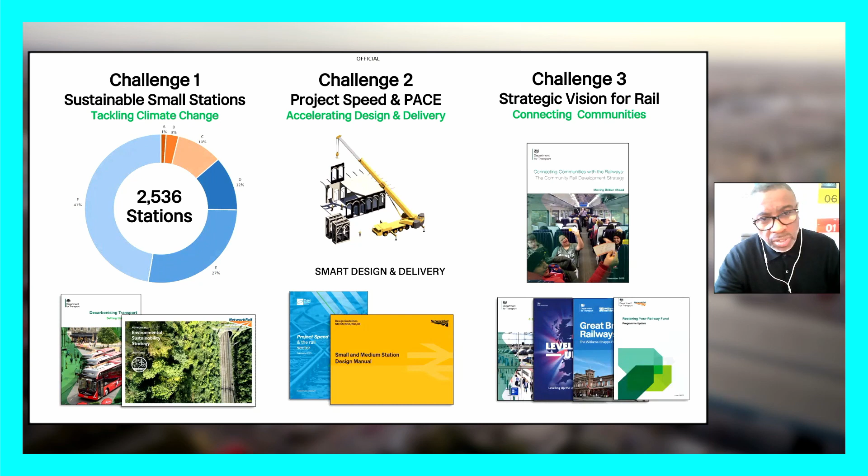Hub station, really, this model addresses three challenges. The first challenge involves making stations sustainable.

We have over 2,500 stations, with medium and small stations making up 85% of those, and the demand for them is growing. These stations can and should be massively aligned with our sustainability strategy and aspirations to be carbon neutral by 2050.

The second challenge is about a response to the government's Project Speed process. It's really to accelerate the design and delivery of key infrastructure, and we've tasked ourselves with producing a benchmark industry reference design for stations that embraces four main design drivers.

We build only what's needed. We build adaptable and reusable infrastructure. We use smart design and delivery technology, off-site fabrication, and modern methods of construction where it's appropriate.

And lastly, the third challenge, to me one of the really important ones, is that successive governments have a vision for making the railways more community focused. So there are various published white papers pointing to this strategic direction, and it's really about responding to the levelling up agenda that's under pressure at the moment, with possible cuts to government funding.

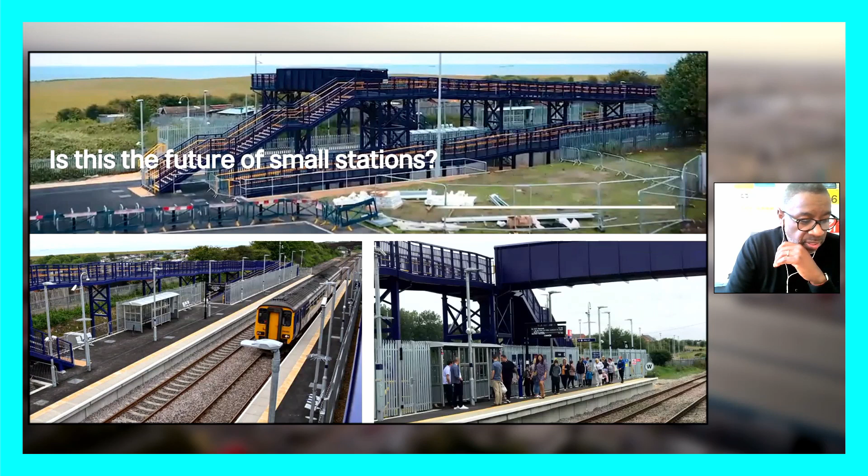So one of the questions we were asking ourselves with what we were currently building was, are we achieving any of this today? And in the course of viewing many stations, which I do as part of my job, we came to the conclusion that we can and should be doing better.

This is a £10.5 million station completed in 2021, and it consists of a couple of platforms, some bus shelters, and a huge car park for 110 cars and over 200 meters of ramps.

And when you look at this, you start to think, well, is it really putting passengers first? It's failing in terms of its ease of accessibility. Sustainability - there's a hell of a lot of steel in this. And, probably in terms of community engagement, it's not somewhere you want to spend your Friday night.

So we're asking ourselves those difficult questions about the small stations we're currently building, and do we see this as the future of them?

So over the past 4 years, we've been going through a series of stages involving research, competition, consultation, and collaboration. We started in 2018 with Tomorrow's Living Station, which was a research piece by Arup, and speculated on the future function of stations.

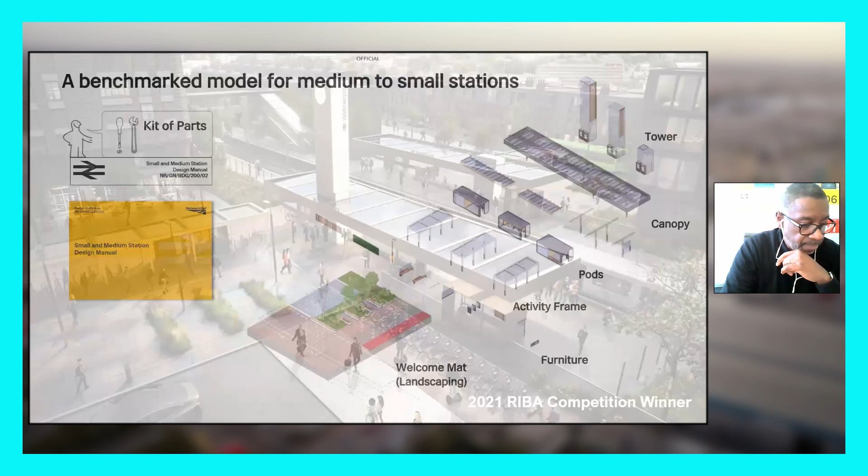What makes the station concept different? It's really a kit of parts designed to suit any location. It's highly flexible, it's adaptable, and it can be tailored to any budget.

And there are 5 main elements. There's a clock tower, the canopy system, what we call an activity frame, a welcome mat, which is another name for the public realm or landscaping, and that's actually part of the station design, and the waiting pods or activity pods that sit underneath the canopy or activity frame.

We're looking to provide this as a benchmarking model for future small stations on the network. The anticipation is this won't be built everywhere. It's not a one size fits all, but it's kind of a benchmark model, and basically a direction we feel we should be heading in terms of station design.

We also developed an implementation plan to go with this, which was aimed at sponsors of stations and really talks about how to implement this. So we provided a design manual and an implementation plan as part of a package of system of works.

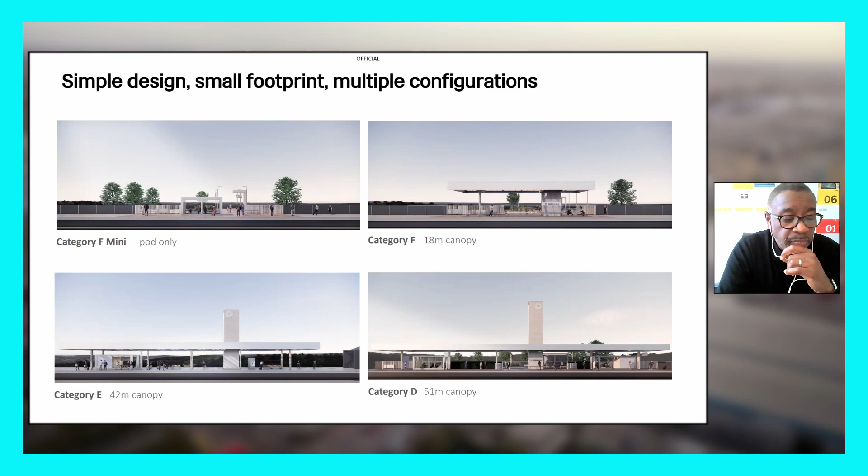The other thing about this design is that it's very flexible. It can be configured to meet a range of station scales, from a very small single platform waiting pod to a medium-sized interchange station. It has a very small foundation footprint, but maximizes a canopy system that is modular, expandable, and upgradable.

We've just completed the Explore Station National Public Engagement Programme, which ran across 11 cities and towns across the UK. We worked closely with the Design Council to assess public viability and acceptance. This included engaging with almost 30,000 members of the public, over 30 hours of independent design advice, and someone somewhere counted 6.7 million social media impressions. Not quite sure how you do that, but they somehow managed to do it.

And we showcased the project recently during the London Design Festival. What was really interesting was that stage one of Explore Station, the public response was quite varied. It was honest and instructive. People liked the design, but had reservations about exposure, security, and local identity. And there was a clear awareness of climate change.

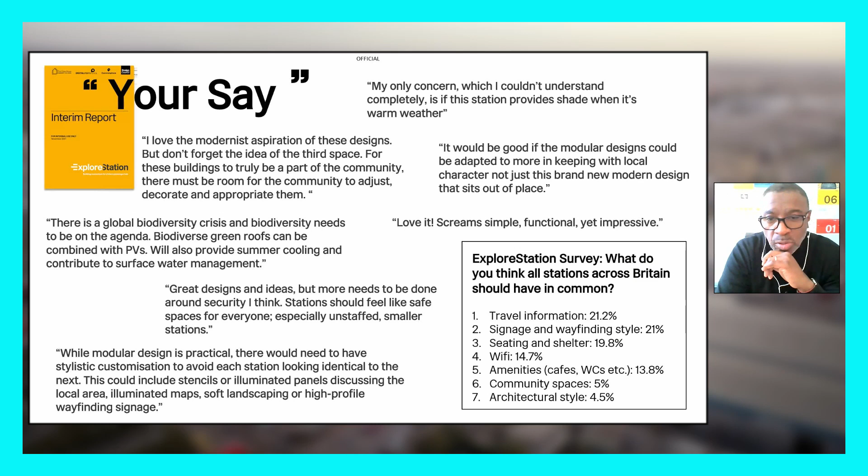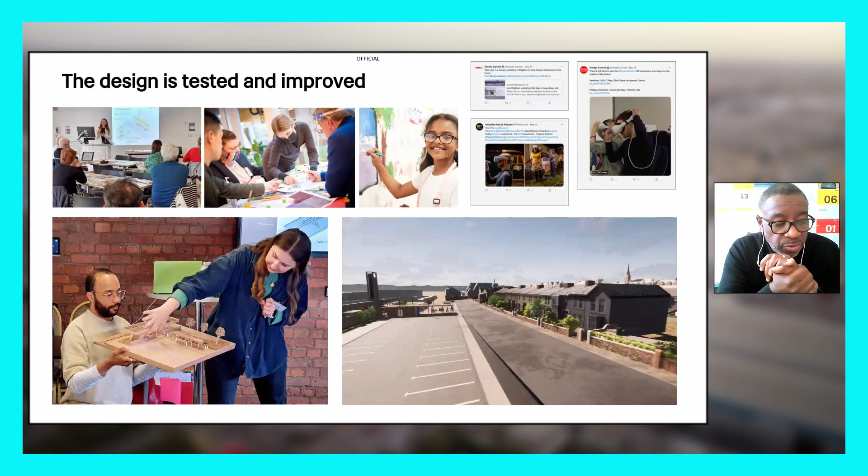Stage two of the Explore Station really was about engaging directly with diverse communities and stakeholders and taking into account their needs, ensuring they were heard, understood and considered, public engagement and collaboration, engagement via the commonplace online exhibitions run by the Glasshouse community led design.

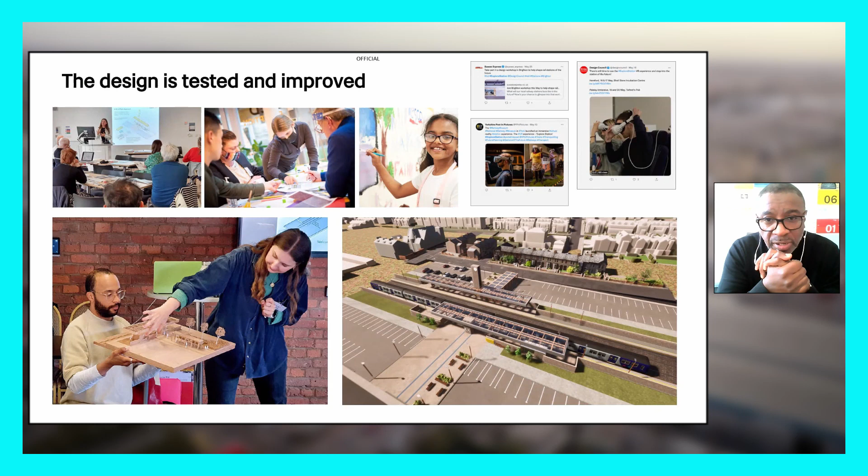Urban, like the animation you see at the bottom right. And it resulted in suggestive improvements to the design, more seating, more materiality, refinement of the waiting pod. And following this process, we can have confidence that the concept has been developed and evolved in collaboration with people and passengers in communities where this design may eventually be delivered.

Some interesting demographics we were able to gather during this consultation process in terms of gender, ethnicity, disability and age. There was an anticipation that the programme would attract a large proportion of people fitting the white middle-aged male demographic, and this was largely borne out. But there were efforts to reach a wider group of diverse groups, focus workshops, and by holding these immersive experiences.

So in the end, we think ThinkStation and Explore Station programs were quite successful actually in gathering a range of diverse opinions, options, and insight.

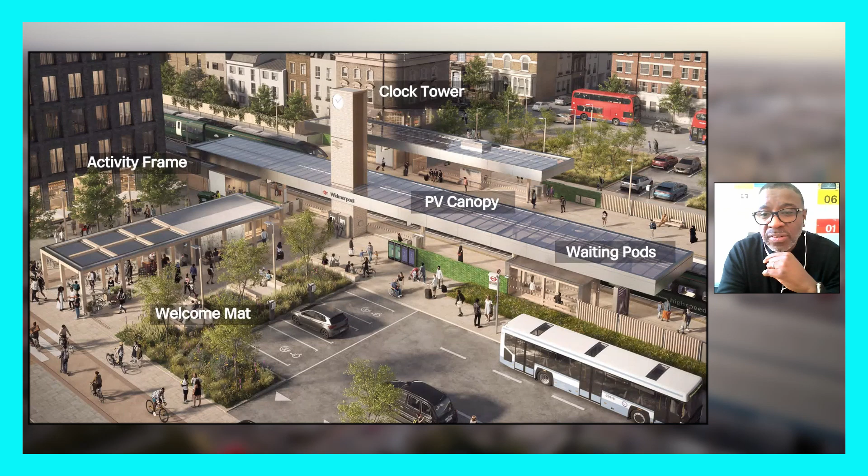I'll run very quickly through these last slides, just to give you a bit more focus and detail in terms of the station, how it is at the moment, how it's developed. These insights really fed into quite a detailed design, which we're working on now, and we're looking to develop this into a part prototype build.

We've had a lot of interest from the various train companies and various sponsors, so it's something that we're developing at pace.

The five main elements of design are a clock tower, a canopy, which is a photovoltaic canopy, an activity frame, the welcome mats I mentioned previously, and the waiting pods. The clock tower is, as well as being an emblematic symbol of stations, it houses all the incoming services, the PV batteries, and an access ladder to the canopy.

And the canopy itself provides, as well as shelter, it provides locally generated power, renewable power, and features a practical cassette system which allows you to upgrade it.

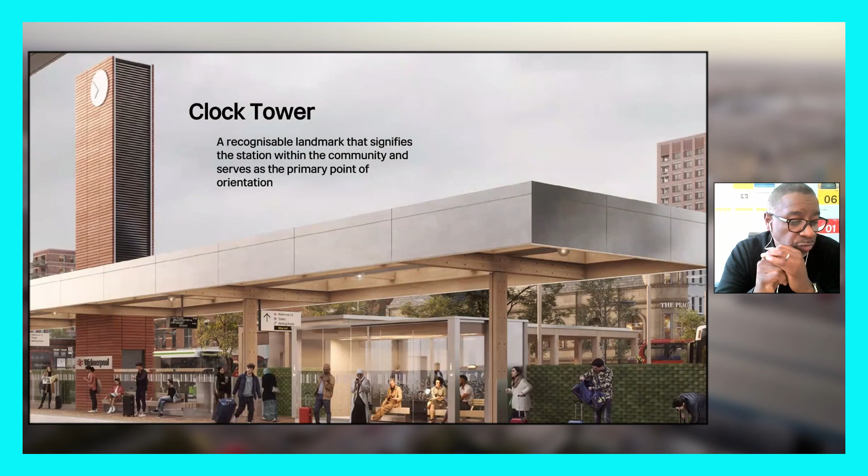Touched on the tower already. The tower also provides us with the opportunity to reflect local context by changing its cladding materials. So it could be timber, terracotta, steel profile cladding, etc., depending on the environment. And together with the feature walls at lower level, this gives designers the ability to add local character and distinctiveness to each station.

Underneath the canopy, it's quite generously proportioned. It's a structure of low embodied carbon laminated timber. It brings natural warmth to an environment. There's, of course, a long history of timber structures in railway history. This one is a modern interpretation of that, really.

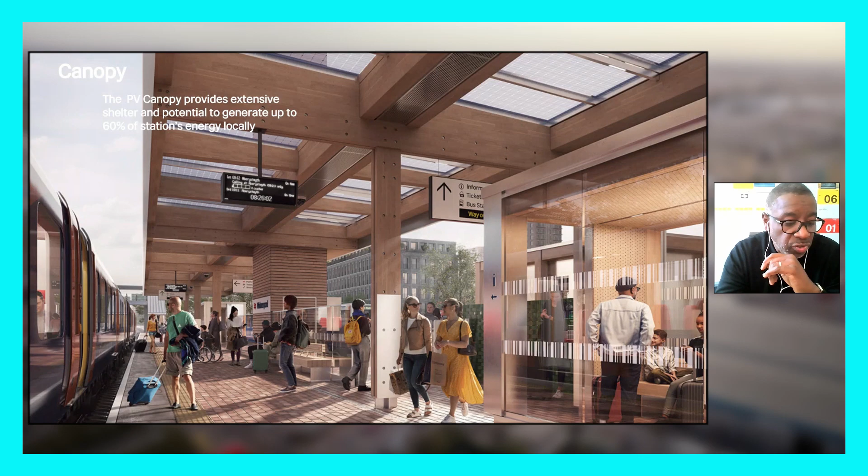It extends to the platform edge, providing real cover while boarding. Services are quite cleverly integrated into a central services spine, which houses cables for lighting, screens, and speakers, etc. So we're trying to do away with the clutter that you normally get with station canopies. And the PV glazing has the potential to generate up to 60% of the station's low power requirements to feed stuff like lighting, ticket machines, info systems, Wi-Fi, heating, that sort of thing.

Even at the smallest, most basic station, the option of the canopy provides ambience, level of cover, amenity, lighting, and basically improves the experience of waiting. It provides a spatial dimension that allows things to happen underneath it. Its extension along the platform allows passengers to spread out and makes it more efficient in terms of boarding and disembarking from trains. So we're looking to move from bus shelters, if we can, to at least something of this level of cover and value, really.

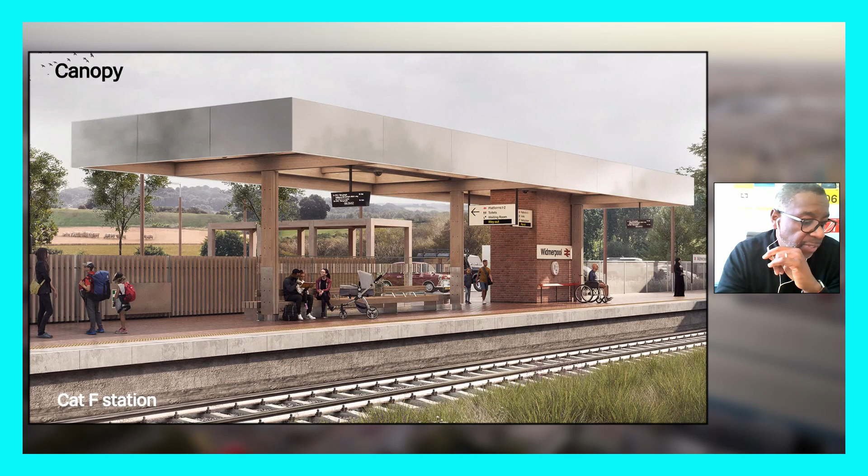Moving very quickly on to the welcome mat. Now, this is the thing that really distinguishes this station. This is designed as part of the station itself, so it has been factored into the cost of the station. It contains an activity frame and landscaping that actually continues all the way into the station onto the platform itself. These become a common built-in element and meeting place for social activities, and also a means to integrate climate resilient public realm design.

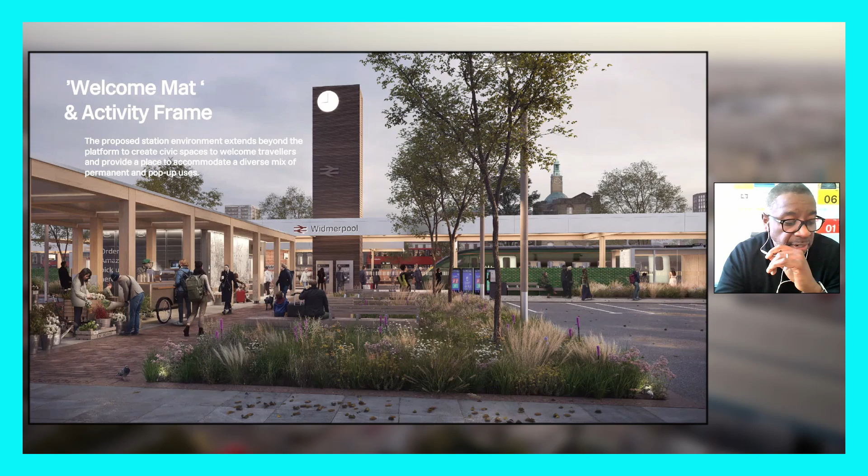The welcome mat means the station environment extends beyond the gate line. The activity frame is a simple, cost-effective rope and timber pavilion that can be scaled and adapted to each location. It creates an adaptable civic space for community uses that can accommodate a range of uses, pop-up activities and other uses. For large stations, it can be expanded to facilitate coffee kiosks, parcel pickup points, etc., that sort of thing.

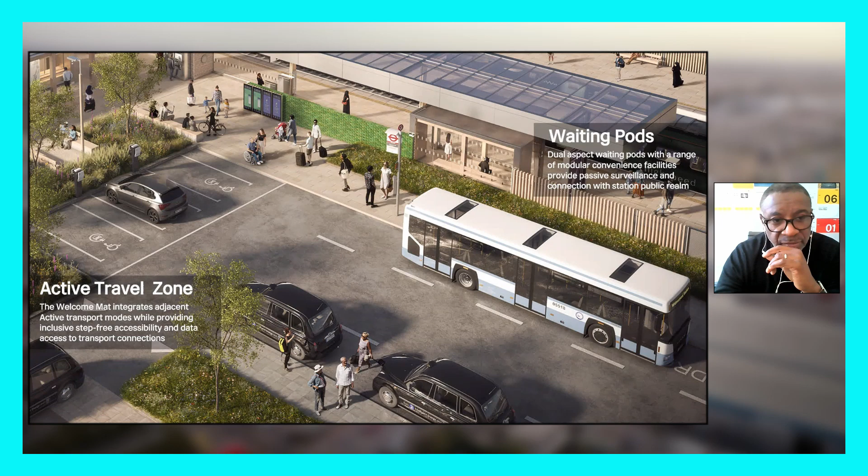This is a smaller version of it, for small stations, where it provides a flexible location for cycle parking, for example, or a weekend market, or other meanwhile activities. We're still looking at how we make the active travel zone next to the station work from a mobility, connectivity, and security point of view.

And finally, we're trying to redefine the comfortable modern waiting shelter. We're moving beyond the bus shelter to something a little bit more welcoming and comfortable, one that can work independently or be placed underneath the canopy or the activity frame. There's work still to be done on this, but the aspirations are a kind of transparent dual aspect waiting room with high visibility, integrated lighting, heating, customer information screens, and Wi-Fi, all powered by renewable energy.

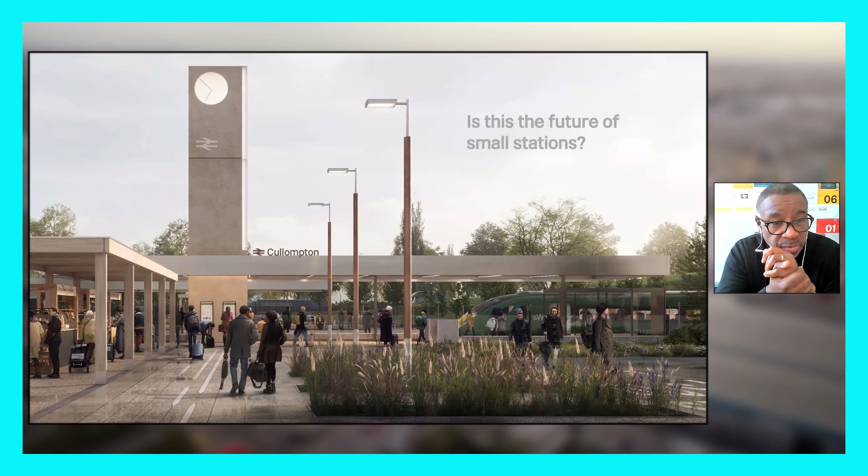Thank you very much, Frank. That was really interesting. How many stations did you say that you were planning on rolling this out? Was that 2,500? Is that an existing number, or is that a future projected figure?

That 2,500 is the existing number. So we're not planning to roll out to 2,500 stations, but certainly there's a substantial number of what we call smaller metro stations, I suppose, that are being planned. Some new lines that are opening, new residential areas and new urban quarters kind of need stations. And stations aren't just built by Network Rail, they are built by local authorities, they're built by developers these days. So anyone can basically apply to create a station, if all of the business case stacks up, etc.

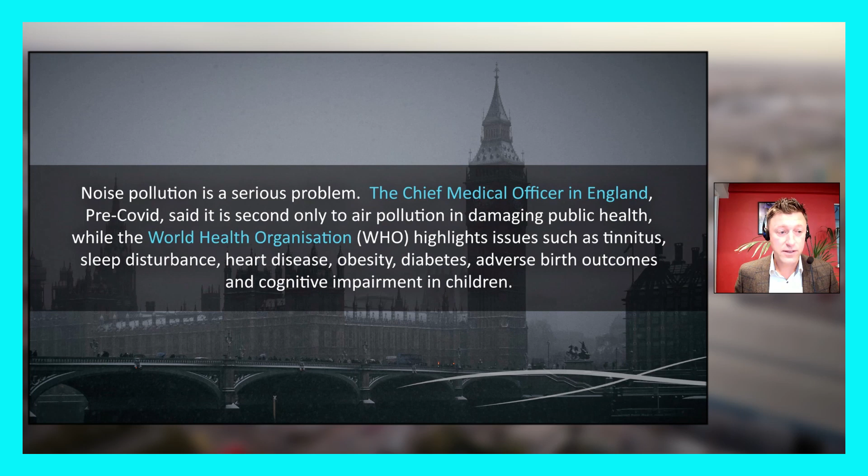What most employers don't realise is that prolonged high noise levels can actually cause serious non-hearing related health problems. The chief medical officer in England, pre-COVID, said noise is second only to air pollution in damaging public health, while the World Health Organization, who we've heard quite a lot about in the last few years, highlights issues such as tinnitus, sleep disturbance, heart disease, obesity, diabetes, adverse birth outcomes, and cognitive impairment in children.

But there is another noise-related safety concern that should be taken just as seriously when it comes to warehousing or fulfillment centres. High noise levels in the past have led to the use of ear defenders. The problem with ear defenders is you can't hear fork trucks coming or warnings from colleagues about falling objects. Even without ear defenders, reverberant spaces tangle the sound so much that you still may not be able to hear the vehicle coming or an important warning.

Emergency safety announcements are also difficult to decipher, especially for those with hearing conditions like tinnitus. Simon Wayne is Operations Director of Parcels and Post at Ascendia and has a career in e-commerce and fulfillment at major UK retailers. He says: mechanical handling equipment is noisy. There's the beeping, the reversing vehicles, and from a safety perspective, being able to hear any warnings, beeps, etc. is very important. One very relevant thing in the last 2 years is COVID.

In noisy warehouses, you tend to get closer to talk to people, and you're shouting in their faces to be heard. Voice picking is used a lot within the e-commerce sector, where warehouse operatives use a headset which gives picking instructions, and users have to acknowledge instructions verbally. These systems are highly sensitive and have noise suppression, so they can be badly affected by noisy warehouses. It's much more difficult for people to hear instructions with fork trucks clattering around in the background or going over uneven concrete. A noisy warehouse environment thus becomes challenging to manage.

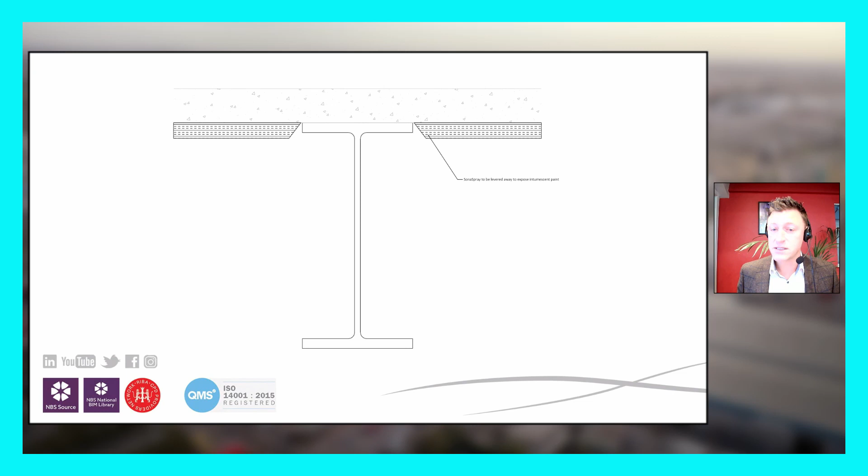SonaSpray is the only acoustic product allowed within 50 millimetres of intumescent steel coatings without invalidating the fire rating. Our detail combined with superb fire performance enables us to spray right up to them, omitting the requirement for expensive and unsightly stop beads, which can also add a lot to the time of the program.

It can also add value to the property by having great environmental credentials and enabling full BREEAM points. Studies have shown that in some cases higher rents and occupancy levels can be achieved with higher BREEAM ratings. So it contributes to each of these environmental accreditations.

It's also a low emitting building material, so it achieves M1 classification, which is the best you can get for a building material, compliant with the California Department of Public Health, GREENGUARD Gold, and BREEAM's rating for air quality. It's also got EPDs in accordance with ISO 14025, and it can contribute up to 17 points towards the LEED score of a project.

All installations are carried out by fully trained in-house teams, which is important. That's all they do, all the time. So it's not a dry lining company having a go at a spray job every now and again. They specialise in it. And to complete the environmental jigsaw, Oscar Acoustics are ISO 14001 certified.

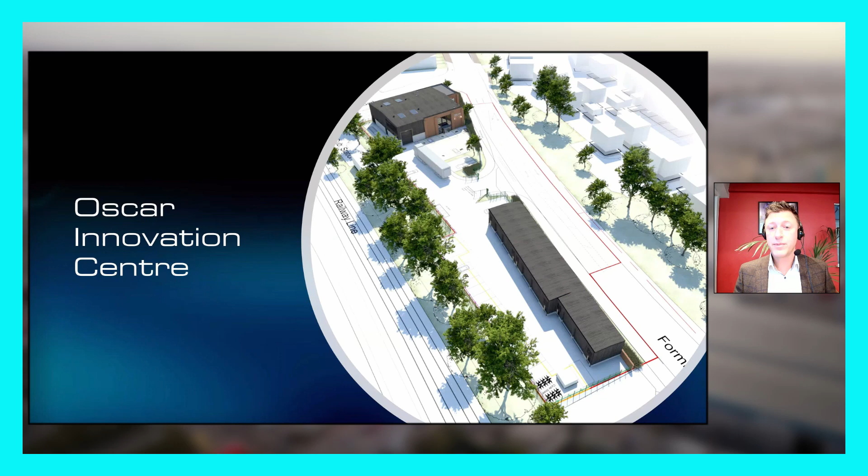Due to popularity of the product, we've hugely outgrown our current premises and are about to start building our new 16,000 square foot Oscar Innovation Centre. This comprises a large warehouse and product development facility cloaked by a brick facade, hiding the warehouse from the road and the houses opposite. The long building is 6 separate double-height industrial units, some of which will initially be let to local innovative companies on short-term lets. This will give Oscar Acoustics room for further growth.

The scheme's been designed with urban and rural architects and has been welcomed by the local community. It's had no opposition at all from anyone around, including all the houses opposite, which was nice. I'm not going to go into too much detail on this today, as I'm going to save the whole project for a future presentation. It's extremely exciting for us, though, as you can imagine.

The plan is to make it a great place to work whilst fulfilling our storage and logistics needs, which have become challenging. In order to aid collaboration, the space is to be open plan with bifold partitions for private meetings and presenting webinars like this.

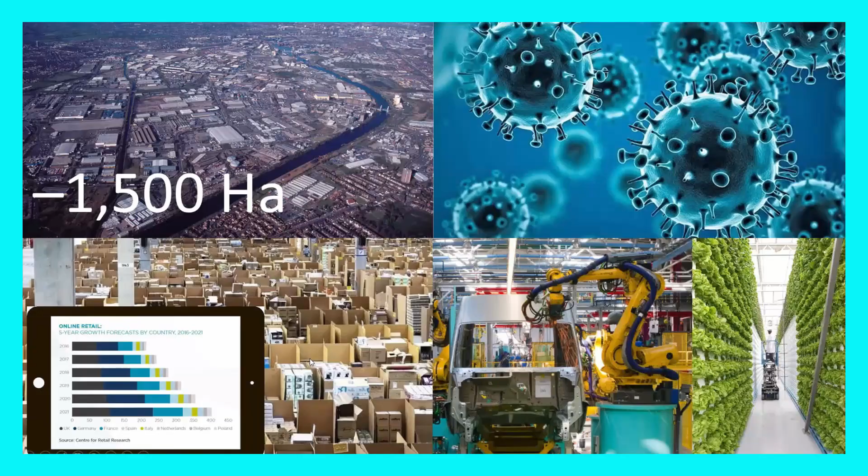We've been working in the industrial sector for about 5 years now, and I thought I'd start with a broader introduction to the sector generally, and the master plan in which Industria sits. It's a sector characterised by a lot of change over the last few years. London has lost a lot of industrial land over the last 30 to 40 years, something like 1,500 hectares since 2000, which has driven a market and a need for industrial space.

There's also structural changes within the industry. The demand for logistics space has been driven by year-on-year growth in e-commerce, and COVID in the last few years has accelerated that. Major lifestyle changes and more online shopping has also driven that need. In addition, there's a whole range of new users in the sector, such as urban farming, last mile logistics, dark kitchens, specialist wholesale uses, battery buildings and so forth, broadly termed new industry, also operating out of those industrial spaces.

We got involved in Barking about 4 years ago now. We carried out a master plan and vision piece for the Thames Road, River Road area for Be First. This is a district largely made up of traditional single-storey crinkly tin sheds of various ages.

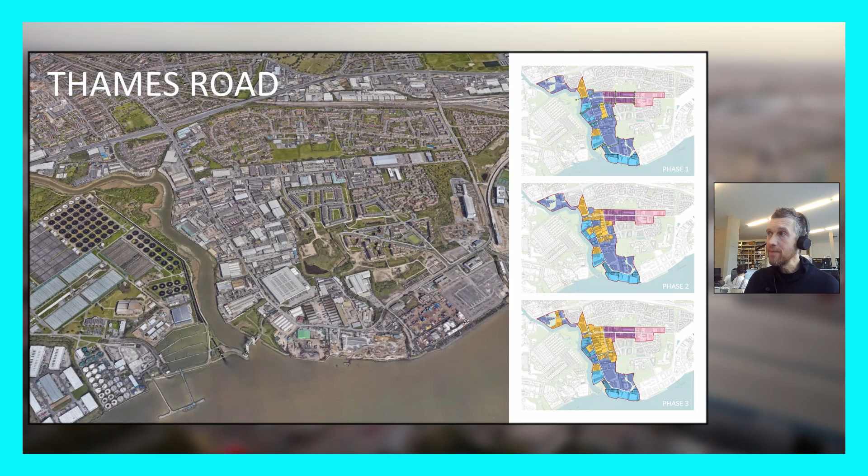Our site, Industria, sits in the centre of that yellow zone, so it's one of the plots where we're looking to intensify floor space within the borough.

We carried out that master plan starting in 2019. We were then fortunate enough to win the opportunity to deliver one of the first buildings within the master plan, called Industria. The vision for the scheme, as far as the borough is concerned, is that it should be an exemplar to catalyse the market in industrial development within the area, and to demonstrate that multi-level industrial space can be a viable commercial way of developing a site.

We get around 11,000 square metres of floor space in the scheme overall, mostly aimed at the smaller end of industrial units. We've got light industrial units of between 300 and 500 square metres, and then 2 floors in one wing of smaller makerspace, or flatted factory units as we call them, that range between 20 and 100 square metres.

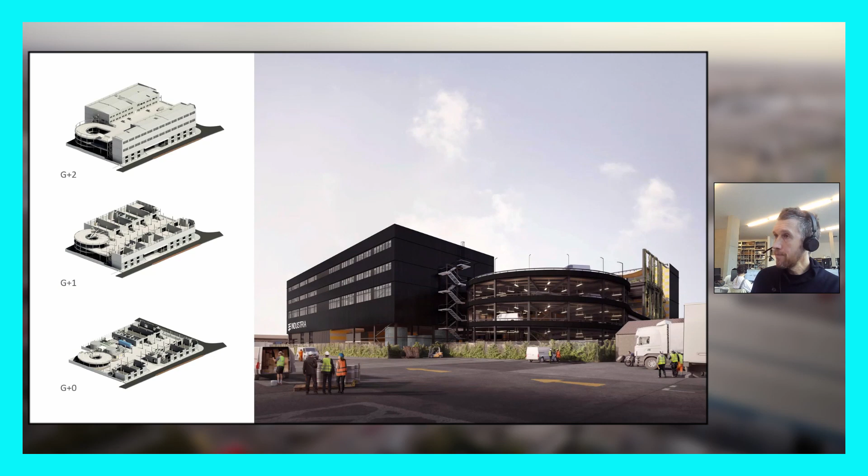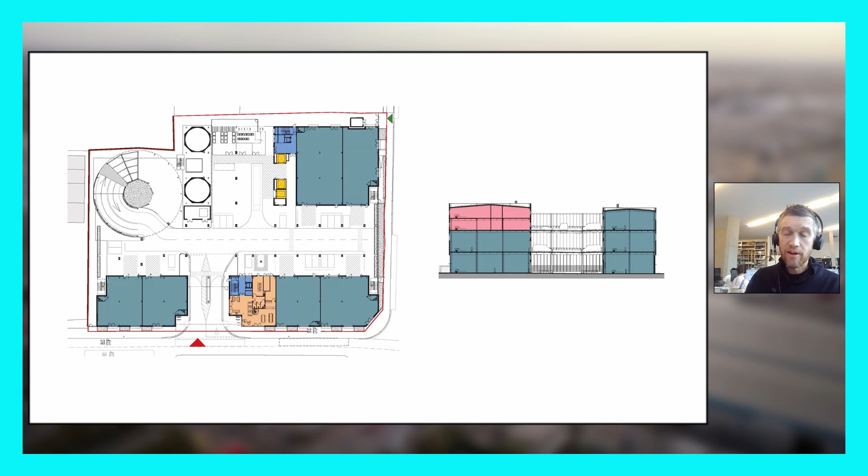There's very heavy floor loadings required for these types of schemes. Ground floor is 25 kilonewton loading. The typical upper floors are 15 kilonewtons, and the flatted factory floors vary between 7.5 and 10 kilonewtons, so significantly higher than traditional commercial or residential space.

That sort of drives the structure for the scheme. We've got a large steel frame, very heavy, with large section sizes to deal with those loads. The frame grid is traditionally an 8 metre by 8 metre, or 8 by 16, in an industrial setting, and that's to deliver flexibility and suit the racking requirements of tenants and so forth.

Steel's an obvious choice from the point of view of achieving those wide spans to deliver that flexibility of users, and also in terms of cost and speed on projects like this. I'll talk a bit about the viability challenges in a minute, but really, the reason this type of multi-level development hasn't happened historically is that the viability equation of build costs, industrial rent, and industrial land values has meant it hasn't been viable or attractive to developers. So for us, delivering the scheme on budget to meet that viability was really key to proving the concept and making the scheme successful.

These site shots are from a few months ago now, so we are about 3/4 of the way through the build, due to finish in February or March next year.

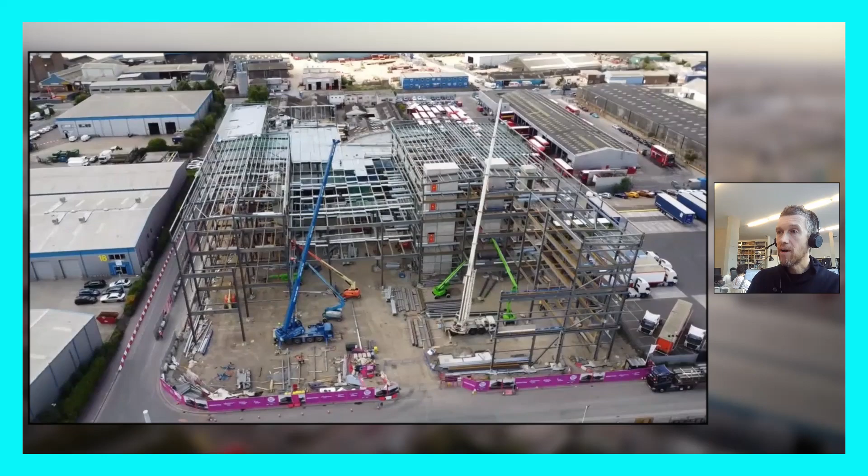I've got a short video, some drone footage that the contractor's been supplying of the build as it goes on, where you can see the two wings under construction and the decks running through the middle. It's quite a tight site — we've pushed right out close to the boundaries on all sides, as far as we can, to try and maximise the floor space intensification we're achieving across the site.

We're working on a short promotional film that you'll hopefully see in a month or two's time, to coincide with the marketing of the units, which will incorporate some more of this drone footage.

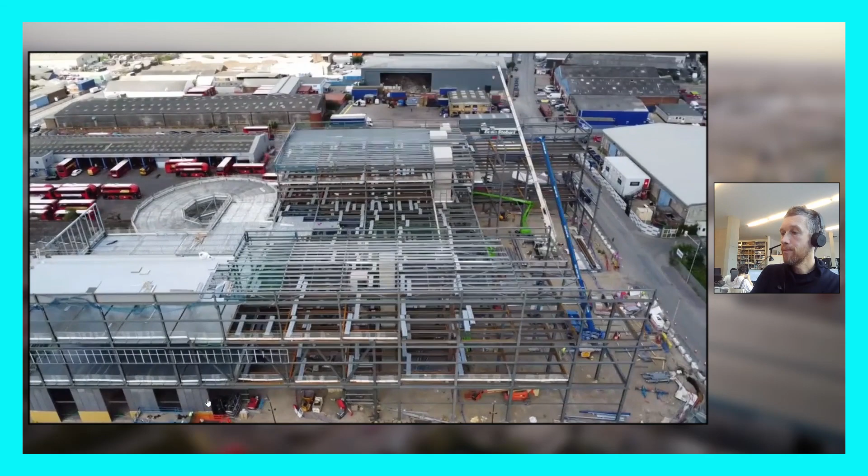So in terms of the products I thought I'd talk about today, really the most interesting for us are probably the cladding products we've used. We've had to learn about some new types of systems to deliver this building. There are three main cladding systems we've used. On the outer-facing street facades, we've got a panelised precast concrete facade system used on the ground floors, which is very robust and textured and gives life and quality to those facades nearest the street. That alternates with double height glazed shop front openings on the ground floor to animate and give views of what's happening within.

Then on the upper levels of the street facing facades, we have a very simple, elegant, crisp black metal cladding system. And thirdly, on the interior deck facing facades of the building, we've got a more playful, textured, profiled metal system - the stripy pajamas, as it's been termed, which you see peeking out at the entrance and on the open deck ends of the building.

We've also worked with graphic designers DN & Co to deliver some really large format super graphics and signage that appears around the building facades, using that very restrained, elegant black cladding system as a backdrop for that. The concrete system is a precast panel.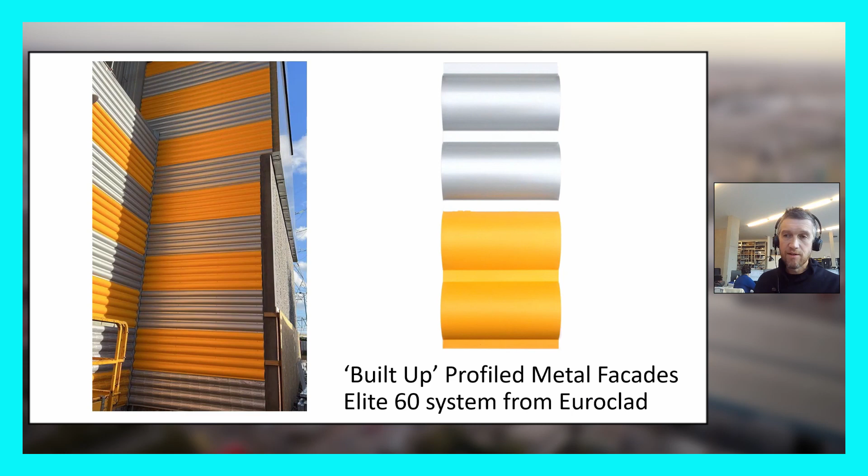So here's a couple of images of that built-up profiled metal facade system going in on site. And that again is from Euroclad, the Elite 60 system. Again, very good air tightness and U values achieved.

So overall, as I've said, we're really excited to be innovating, bringing forward one of the first of this typology of building in the UK. And I suppose our vision or stated aim is to deliver a generation of industrial buildings that are as beautiful, flexible, and long-lasting as the best examples which we've been left with from the past. So that's me. Thank you very much.

Thank you very much, Hugo. A very interesting project. And like you say, you built it in for longevity.

It's interesting coming from a firm that I know really thinks long and hard about how they create a sustainable approach for all their buildings, purely because it is a very, very hard-working building. The fact that you've chosen concrete and steel, I find quite interesting. Were you whirring around a lot in your head about how you might be able to do this out of mass timber, or how it might be workable in other materials?

Yeah, we did look at that quite hard. I think the truth is, the building is a real stretch in terms of innovation and viability and risk for the client at the moment. So they're taking quite a lot of risk. Everybody in the industry who's interested in seeing where stacked multi-level industrial really can work and stack up is going to be watching with interest as BEfirst let this building out. And there's a great deal of skepticism or concern from the market generally, from investors and other developers, as to whether it will work.

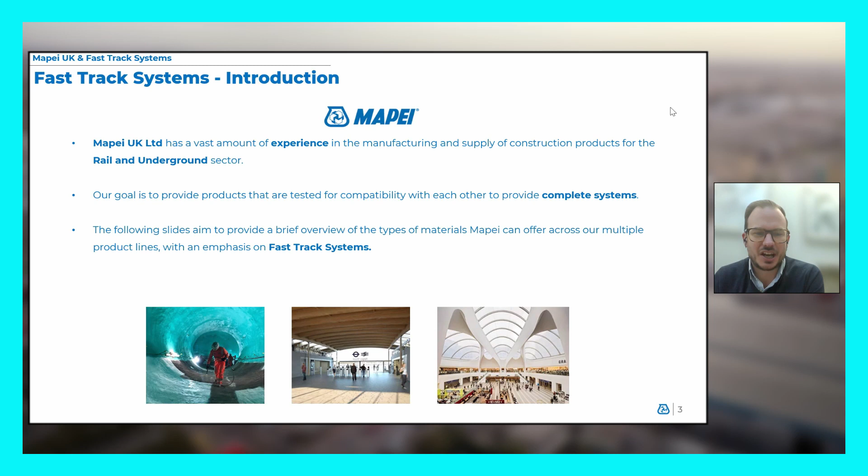Our goal when we produce materials is to ensure they're compatible with other materials in our range, so that we provide complete solutions and complete systems. So when we're looking at floor build-ups, for example, for a tiled finished floor in a station, we're thinking not just about adhesive and grout for tiles, but also all of the subfloor build-up that goes into the floor construction, and requirements in terms of application thickness, drying times, strength, etc.

Hopefully the next few slides will give a very brief overview on the types of materials that we can assist with, with an emphasis on speed for fast track systems, so speed of application particularly. The vast majority of the products mentioned have been used on the London Underground and TfL projects in the past.

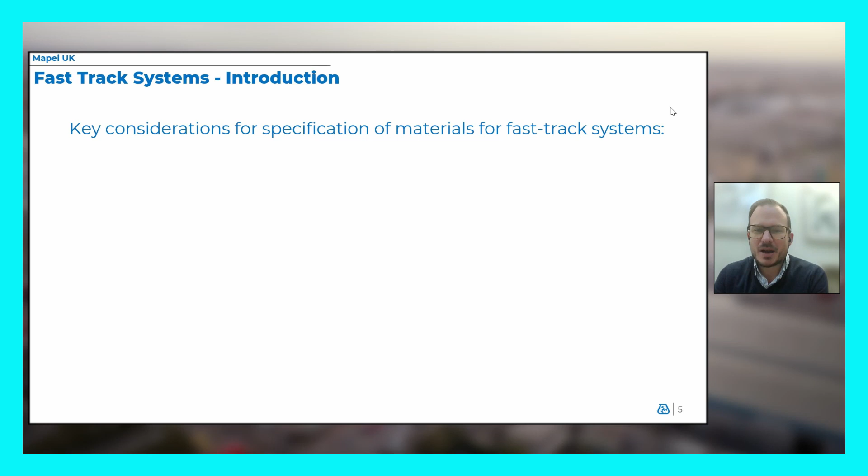So when we're thinking about materials for fast track systems, what are some of the things we're considering? By no means an exhaustive list, but I think it's important to share some of the considerations, certainly from us as manufacturers and in our conversations with specifiers.

When we're looking at materials, whether it's a repair mortar for repairing concrete or an adhesive bonding a tile to a substrate, we need to be thinking about mechanical properties in as much as compressive strength, flexural strength, E-modulus, and the speed of strength gain, particularly for fast track systems, how quickly products are gaining strength.

A requirement we often have in applications such as London Underground refurbishment works is that, for example, screeds are removed, reinstated and put back into service so that people can walk on a tiled layer the next day. So these are designed for very, very high strength gain using various cement technologies to ensure we get that sort of speed.

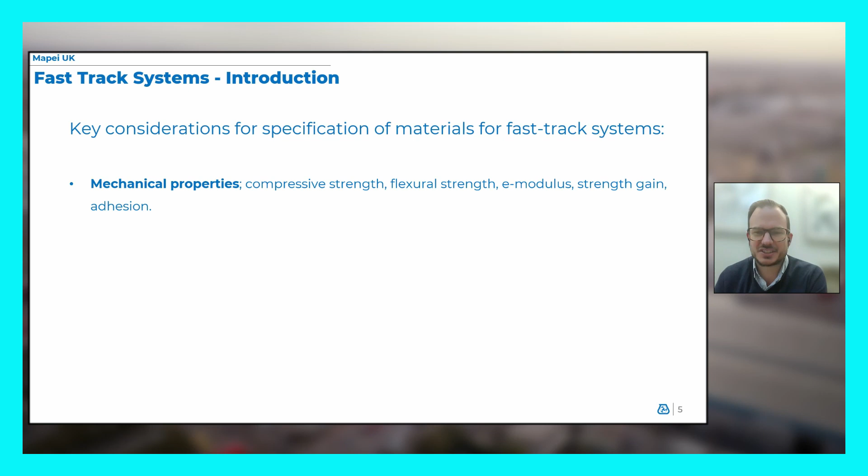Aesthetic and functional properties - from Mapei's point of view, a lot of products that we supply are beneath the finish layer, but obviously a very important aspect is the visual appeal. Within the environment of stations, concourses, but also in areas such as warehouses, functional properties such as resistance to wear, resistance to cleaning, slip resistance are all very important properties, in addition to the application thickness. If we can reduce our material thickness, for example within a screed context, it may be we can increase the amount of insulation or generally decrease the amount of material that's used.

The effect on program from our fast track system point of view is to reduce drying times of materials. A lot of cement-based materials, such as those using concrete and screeds, adhesive products, leveling compounds - these types of materials often have quite extended drying times when we look at traditional cements. So using polymer-modified materials significantly speeds up our drying times. Speed of application - how quickly we can get materials into place, and then how quickly these materials can be trafficked as well.

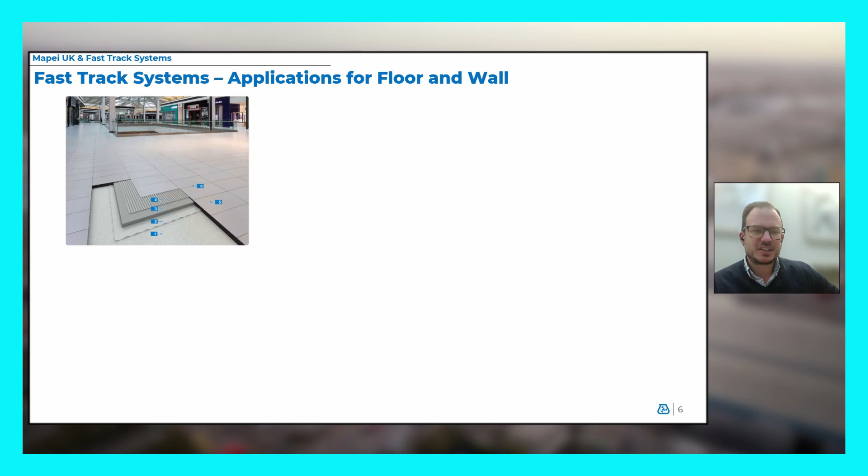So when we look at some typical build-ups within station environments - looking at some typical build-ups then for these fast-track systems, and we'll look at a few of these in a little bit more detail. So, for example, in ticket hall areas, concourse areas, station areas, some of the build-ups that we can see here from the concrete slab upwards.

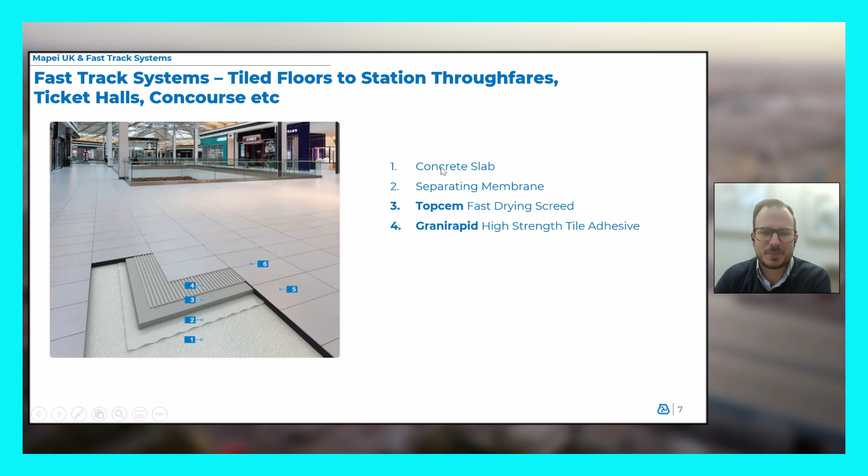From the slab through the screed, through the tile layer, we can see then the need for very high performing materials in terms of resistance to quite intensive traffic that we can expect to find in these types of areas. For example, in ticket halls and concourse areas, it's likely that we're not just going to have pedestrian traffic, but also trolley wheel traffic as well. And so the need for high strength materials very much comes into play.

And of course, when it comes to tiling, looking at solid bed adhesives, the use of anti-fracture matting, for example, as well as very abrasion resistant tile grout.

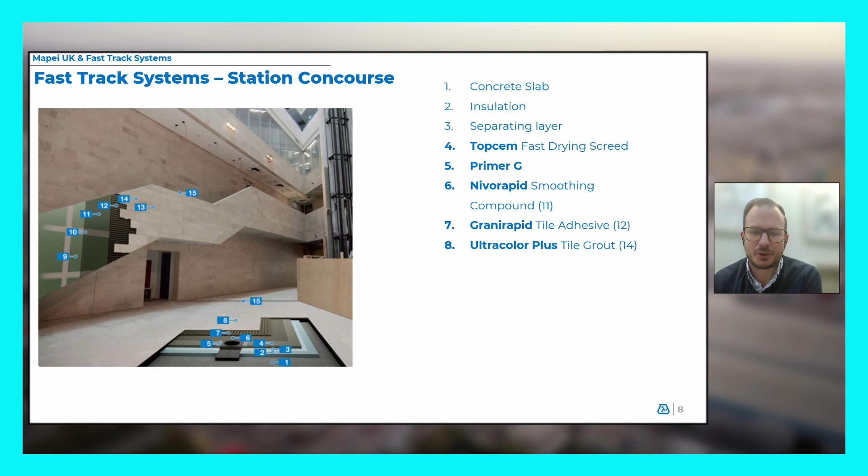Also within our subfloor build-ups and subwall build-ups, when we're looking at our need for screeds and renders underneath our finished layers - as I mentioned previously, for traditional cement-based materials, we're looking at very extended drying times for traditional sand cement-based renders and screeds, often that can take a number of weeks to dry out. At Mapei, we have a number of products formulated to allow for tile and finish applications to take place after just a few days, thereby negating the need for wasted time in terms of program on site.

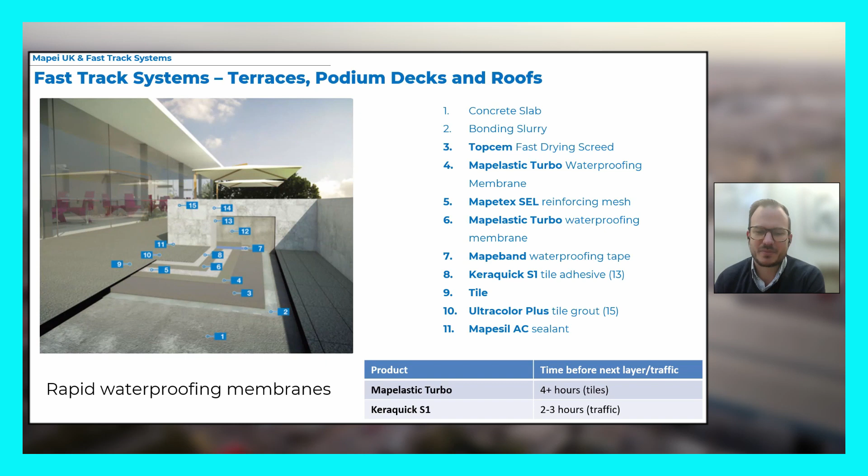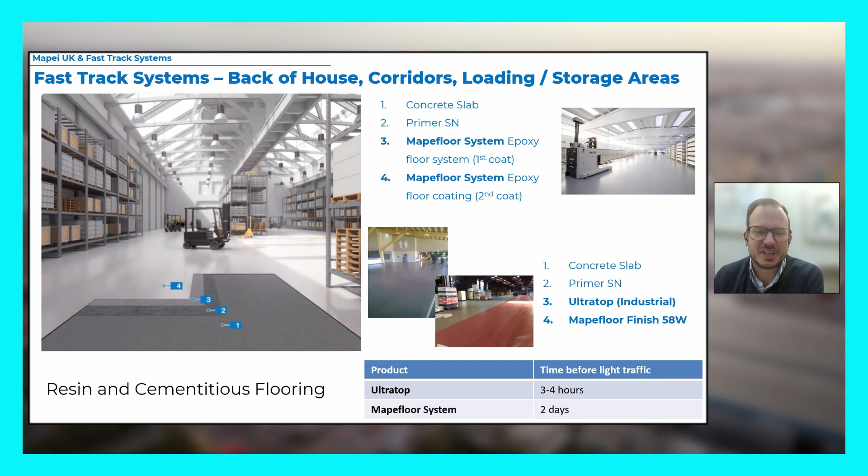Quick to receive traffic after they've been installed - anywhere between 3 to 4 hours up to a couple of days after installation, depending on the system type used. These have very high chemical resistance as well. If we're handling different types of materials that perhaps are aggressive to the surfacing on the floor, then we can have high resistance in our finish as well.

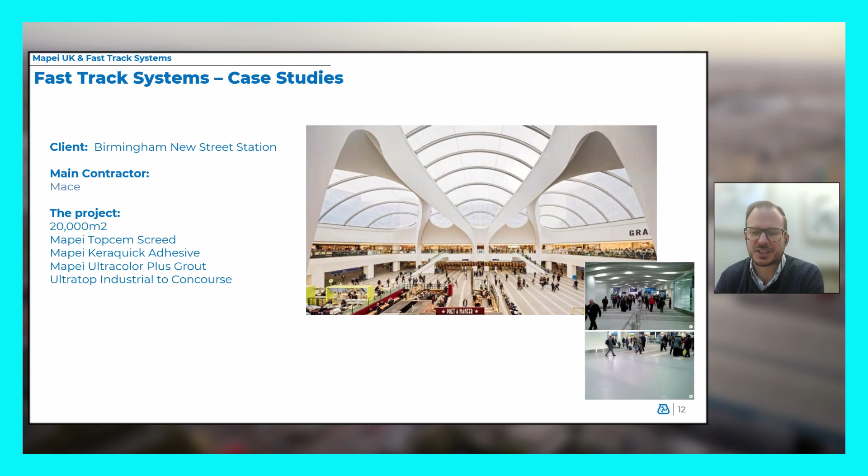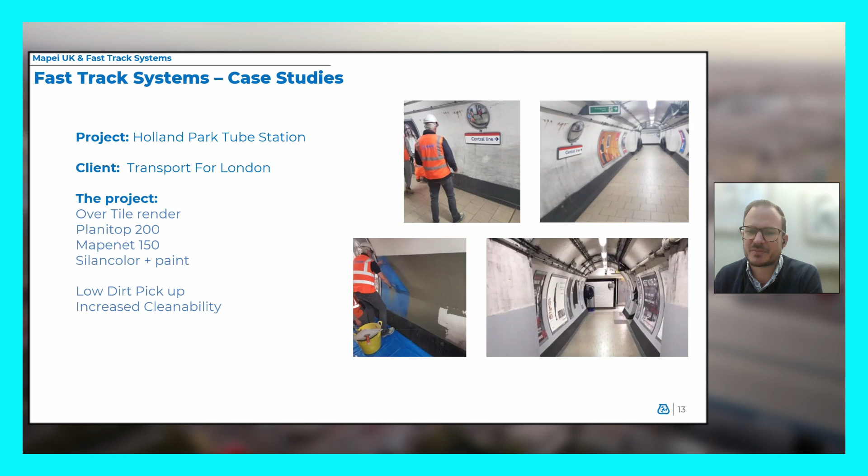And then here at Holland Park Tube Station, we're involved in a lot of refurbishment works for London Underground. Very often speed here again comes into play in terms of refurbishment. So here using our render over tile system, existing tiles that are left in place, we have a system that allows for rendering directly over the top of the tile layer to then receive a paint system that has incredibly low dirt pickup and good cleanability, which means that this operation doesn't have to necessarily involve stripping back to the substrate. Tiles can stay in place and the station areas can be refurbished very quickly.

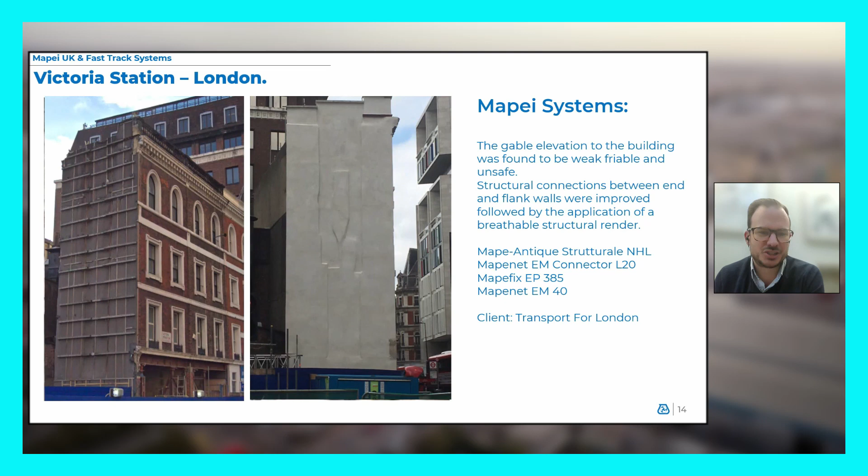So I hope that's been a quick sort of whistle-stop tour introduction, and excuse my cold again. I hope it didn't interrupt the presentation too much, and gave a bit of an introduction as to the types of materials and systems that we can offer.

Thank you, Tim. Tim, you need some Benylin. I think so, yeah, absolutely. Thank you for struggling through there. I really felt for you a moment. I was thinking, I'll take over, but I don't know anything about products. Well done for managing that. Thank you for that, it was a good broad overview.

The question that kept going around in my head was, I know that from remembrance, Mapei's got this kind of very curious looking HQ building, which prides itself on the use of sustainable materials throughout. That's my remembrance of Mapei's HQ. How is it that you managed to get, because you keep talking about how everything shaves time off the program because you can just use your Mapei products and they're all quick drying and they all work really quickly. And I'm just thinking, generally, in the old days, I used to associate quick drying with generally being absolutely chock-a-block for VOCs. So I take it that's not the case.

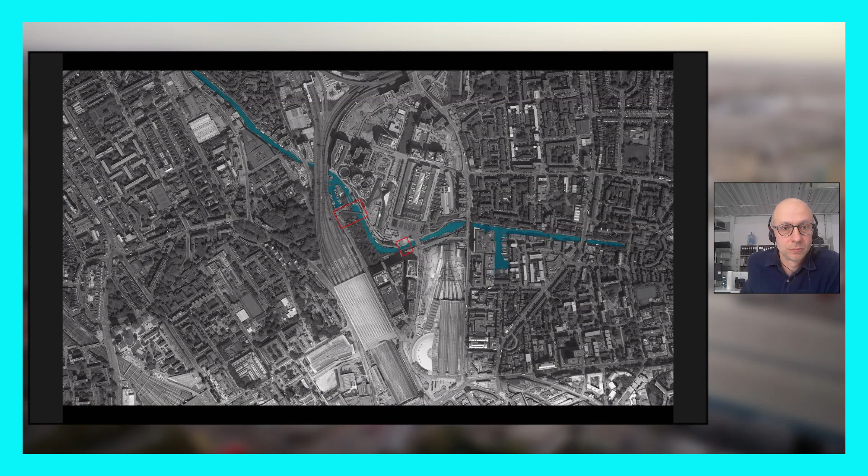So I'm going to quickly talk about Somers Town Bridge, which, as Carlos said, was built around 5 years ago. And it is the westernmost bridge of the development.

It was a challenging bridge to design in that on the Coal Drops Yard side, you're entering the bridge at high level atop a series of historic brick arches, and then it's connecting. That's the point A, and the point B is all the way down to Camley Street, which is

about 5 meters lower. You're passing over the end of the Camley Street Natural Park, an area that nature has taken back over. There's quite a bit of contamination in that area, but it's now turned into a really nice oasis in the center of the city. So it's crossing over that to get you down low - a connection from A to B, and also from high level to low level.

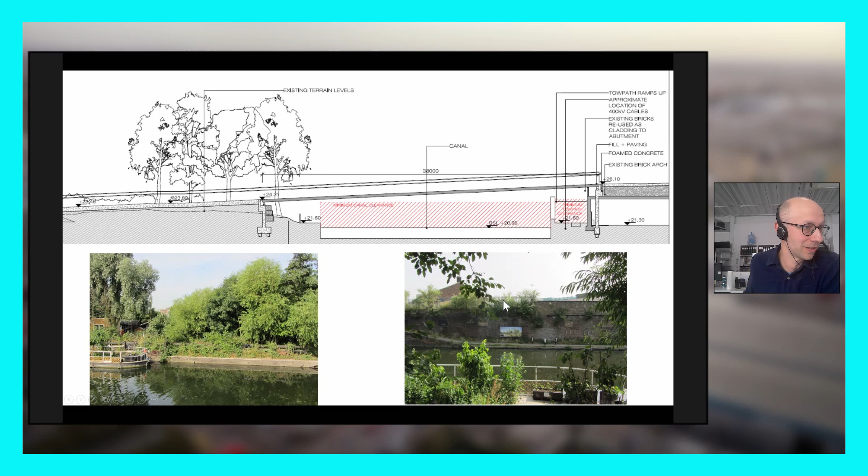You can see here, this is just a diagram showing the constraints - clearance over the canal, towpath on the northeast side, going from high level down to low level. These were the two ends of the bridge before the project started. You can see the nature reclamation on one end, and even the state of the listed historic structures on the other end.

As designers, we like exploring possibilities. This was an early study just looking at how you make this connection from one end to the other, thinking of the entire route as a single design exercise. I think what became apparent was keeping it simple,

really pushing. In order to get enough length of ramp, it meant pushing the entire route to the perimeter of the site, which creates a good experience. It also gives back as much land as possible to the nature reserve, which have since built their new headquarters within the arc of the structure.

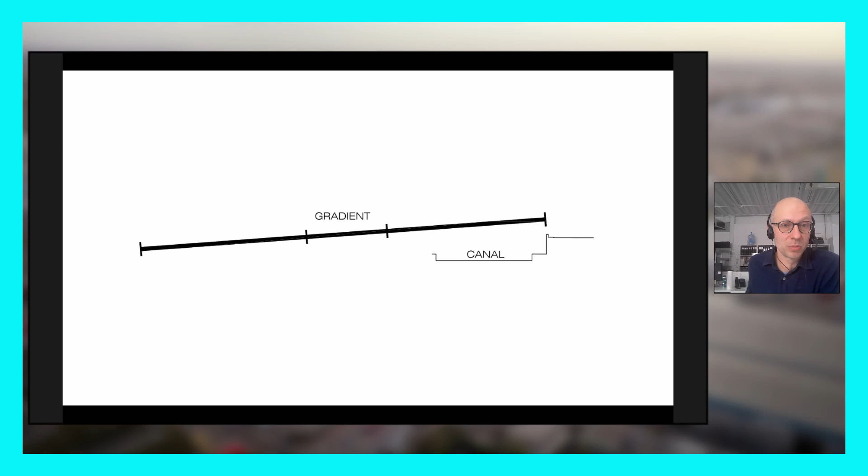Trying to do an exhaustive exploration of options, that led to, in the end, quite a simple, elegant solution. So looking at the total length, considering both the approach ramp and the bridge in one move, understanding how the experience shifts as you move along.

At the bottom end, you're in a more secure, more enclosed situation where privacy to neighbors is important, but as you work your way up towards the bridge, it's opening up to the sky, opening up to canal views, and then you're crossing this bridge, which is a lot about lightness, views, openness.

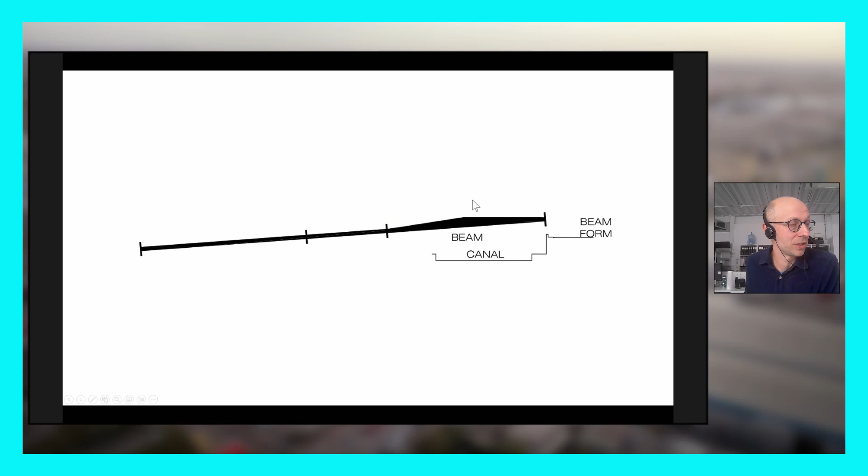Considering the bridge structure itself, which is actually incredibly slender for the span it's achieving. Simple, elegant, refined. One of the original concept drawings showing this.

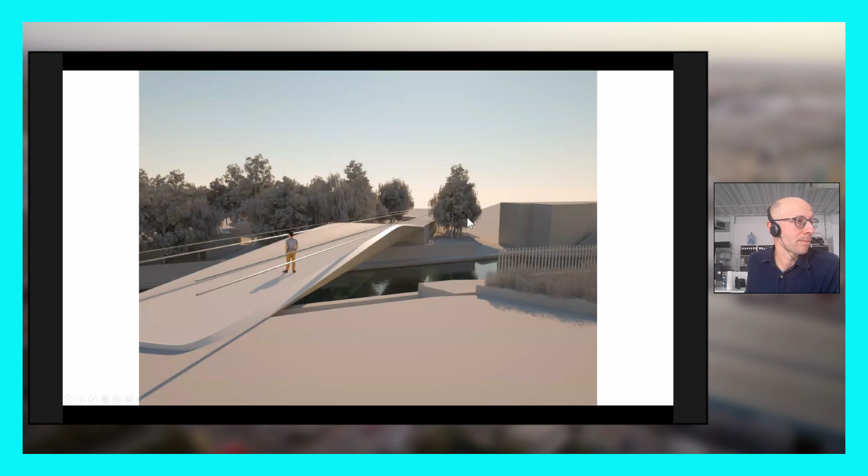Here's one of the earliest models where it just shows this very simple structure spanning over the canal. It's almost as if it's a hot dog bun wrapped around the space, and the space slips out of the bridge and heads down the hill. Considering the whole thing in one go, the parapets or railings extend down the hill to be handrails.

This is what I'm referring to as a kind of inevitability. The way it looks like it belongs there, like it could have been there for a long time, and like it could be there for a long time into the future. That's the sense we aim for in all of our projects.

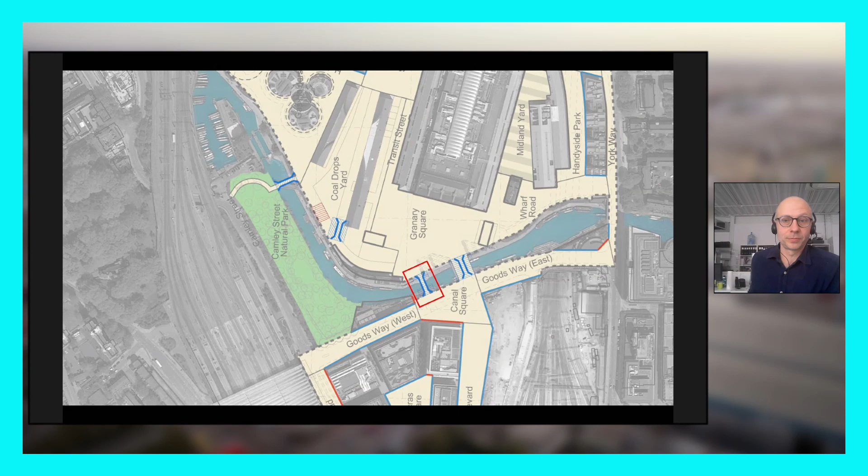It needed to do a little bit more than just form a simple connection. It's more than connecting from A to B.

Unlike Somers Town, which was this A to B connection about an onward route into Camden or to the west, or up to, for people coming from Camden heading towards Islington, this bridge is about increasing porosity over the canal.

It's about providing more options for people moving through the site. It's about connecting Pancras Square to the south through the arcade of shops and restaurants over the canal, and then onwards into Coal Drops Yard. So giving people options. It's also anticipating the high density housing to the north, commuters moving up and down, heading towards the stations at different times of day.

Historic context was obviously really important, especially on this site. It turns out, while we were digging around, we discovered that there were actually 2 bridges built in this exact location in the past couple hundred years. There was a low-level bridge, and then there was also a high-level rail viaduct coming in from the north. We actually discovered foundations from both of those bridges as the design progressed.

So, literally bridges to respond to as we were working on this. I think this philosophy of hardworking, functional, efficient, utilitarian structures was clearly an inspiration for us and the rest of the team.

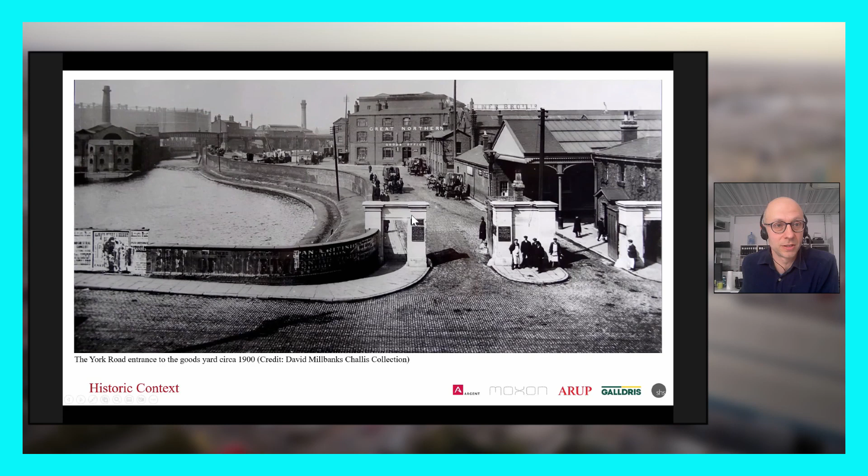I think bridge designers love constraints in a way. I think we like having a puzzle to solve, or very clear things we're trying to achieve. So for Esperance Bridge, you've got the canal, towpaths either side, planter on the south, and you have these 2 landings, which are more or less level, which is a nice feature either end.

And straight away, you understand most of the structure needs to happen at deck level or above. There's not a lot of room below. You couldn't do a low arch over the canal. It also tells us if we need a support, where it could go or how the ends can be supported.

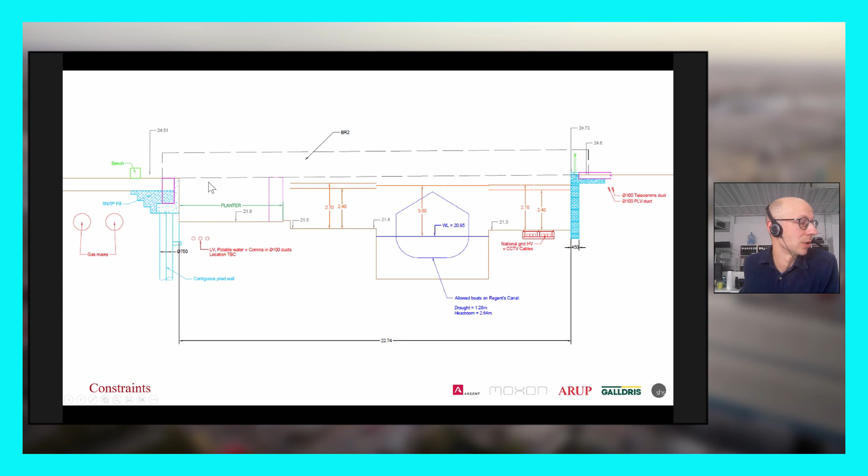So again, looking at optioneering, this was one of the first rounds of ideas we presented to the client. And on this bridge, it's only about 25 meters, which is a pretty modest span in bridge terms. So rather than it being a study of what's possible,

this was more a way to kind of tease out from the client what this bridge needs to do in a bigger sense, how it appears, how people will experience it, whether it's trying to show off or whether it's more subtle and modest.

And obviously it's a great client. They knew what they wanted, so they were very happy to steer us in a certain direction.

So off the back of those, we narrowed it down to 3 schemes. I see the top 2 as more of single gesture schemes, where you might have a relatively refined bridge deck supported on a structure which is a single gesture, whereas the bottom one was more about repetitive elements and putting a lot of emphasis or design effort into those elements, and how by repeating them, you get more bang for your buck.

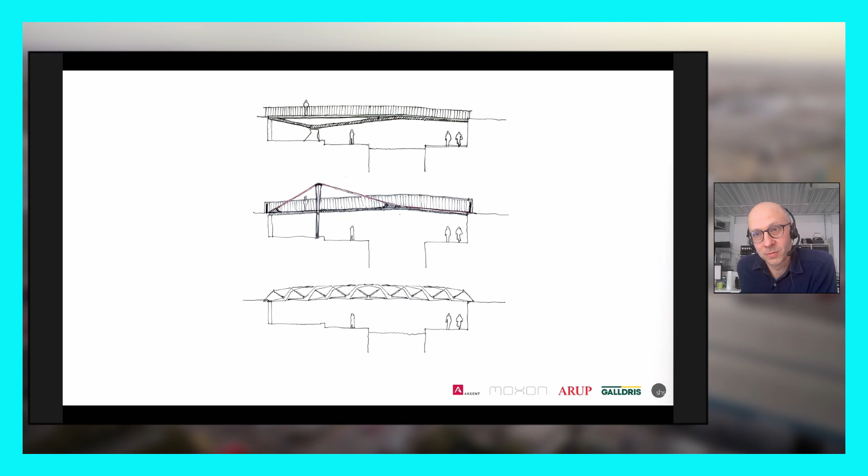You're able to make the most of a highly crafted system of units. So the bottom one was the one, you could probably tell already, but that was the one that was pushed forward, and we were delighted. We thought that idea of really honing in on the elements, the details, the connections, the craft and the finish sits quite well within this historic context. So for us, it was exciting.

Talking a bit more about the process, the collaboration was very good. In addition to lots of client feedback, we had lots of feedback from Camden and the local planners. They're based quite close, so they had a lot to say about this bridge, and one of the exciting things is they totally got it. They understood why this bridge was important and how it would stand out from the adjacent bridge, and how it would be a bridge for people, for pedestrians, not for cyclists or car traffic. Despite the outline planning stipulating a 3.5 meter width, they pushed us to make it narrower and more intimate, keep the railings low and keep it really pedestrian scale. So right up until the planning application, we were still refining the overall proportions.

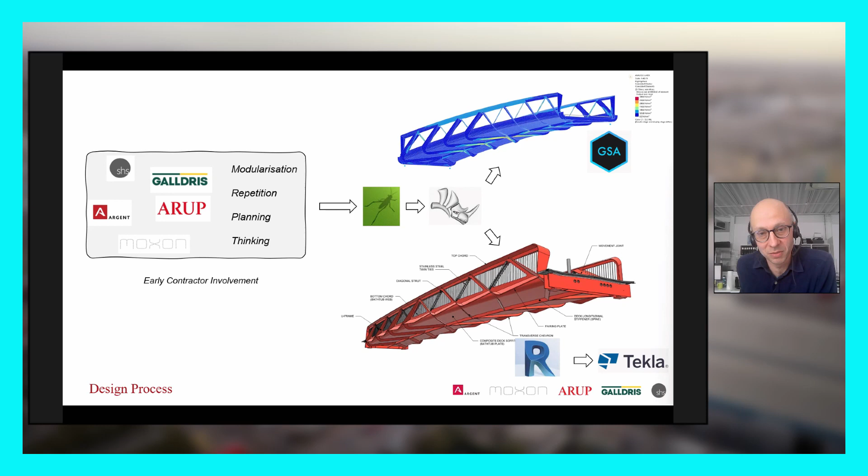Just really quickly, these are slides usually presented by my engineering partners, but I'll go through them fast. It almost goes without saying at this point, but the ability to share models and files and information was important. On this one, I'm pretty confident to say this was probably the closest experience I've had to being able to work on a model and pass it off, and it gets passed off again, and then the built result is almost exactly the same as the original model. I think that was quite exciting. Having the contractor and the fabricator involved early on, we knew what to model because we knew what they wanted to build, so it was a really fluid process.

One of the biggest carbon success stories on this project was the fact that the wall to the south - there's actually a retaining wall there - the engineers put a lot of time into surveying, studying and testing that wall to determine whether or not it could support the load of the additional bridge, and it could. That meant we pretty much had a free support at one end, and as that's the most carbon intense part of the project, we're delighted to get that for free.

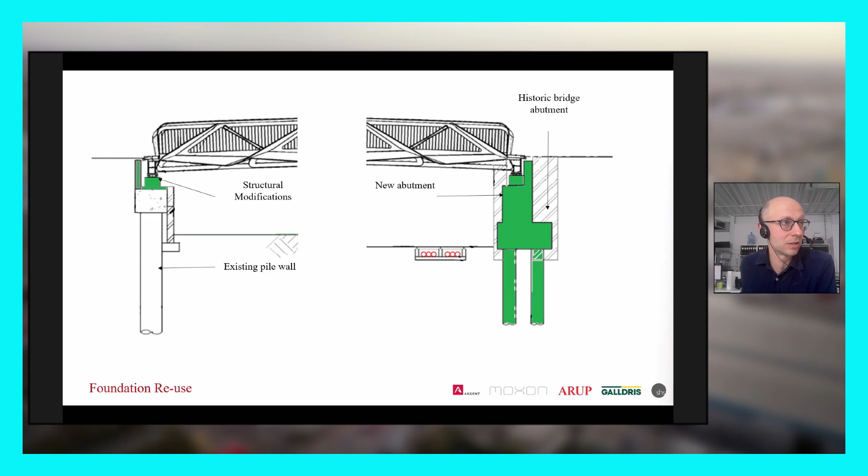At the north, what you can see here, this big hatched area is the old brick supports from one of the old viaducts. There was some complication around that, but in the end we were able to use it to stiffen up the area as we piled through to create a new abutment. We looked to reuse it, but just the need to rely on it for the next 100 years meant it was a little hard to convince everyone that would be possible.

The truss form itself—trusses are a pretty tried and tested solution, quite a good structure for this span. It puts the structure within the parapet, so the structure is the parapet, which is a good advantage.

Here it's about reinterpreting that traditional Warren truss, using the plates and the geometry to express the forces. So you have compression struts articulated in one way, and tension ties very much articulated to showcase what they're doing. Sections are T sections in profile, so they handle buckling in both directions. Essentially, all the plates are working in a very specific way, and their shape and articulation is tailored to that function.

An example of that are these tension tie details, which were always meant to stand out, and they do catch people's eye. I think the level of craft that went into them is quite good. The complexity of building them was not straightforward, but it was something we had ideas about early on, and good design meetings to flush out the solution.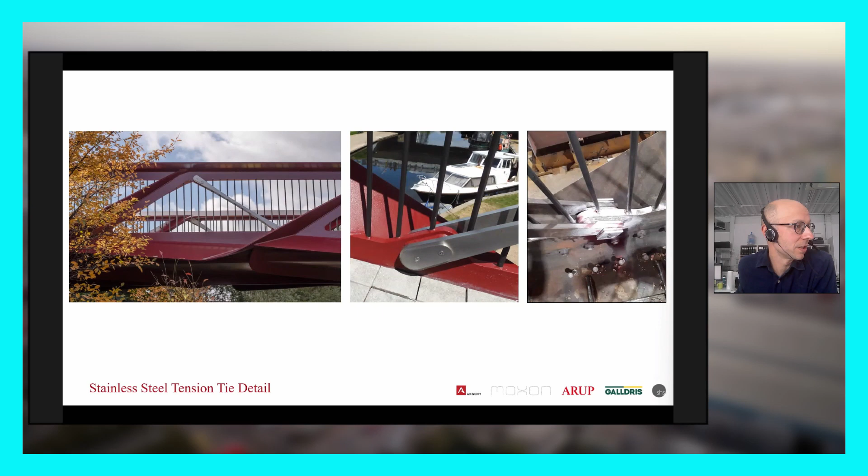One of the things we felt really strongly about was the user experience here—this idea of literally taking the stone paving of Granary Square and pulling it across the bridge. It meant a much sturdier, solid feeling bridge than you might find other places. But it also meant, in order to do that, we needed a really robust structure.

So the way it works is what we call a steel bathtub, where you have a steel shell and then it's infilled with concrete. The steel and the concrete work together compositely, and then you lay stone on top of it.

The second advantage is the way the bridge came to site—it already had parapets up, which meant a safe working environment for the people pouring the concrete and laying the stones.

Mock-ups and samples are all really important to the process. This was a mock-up we commissioned midway through the design, just to test the feasibility of bending these quite thick plates, welding them back together, grinding it, sanding it, making sure it was smooth, and then painting it as well. This mock-up was actually on site for a couple months in the summer, and it almost looked like a bit of sculpture.

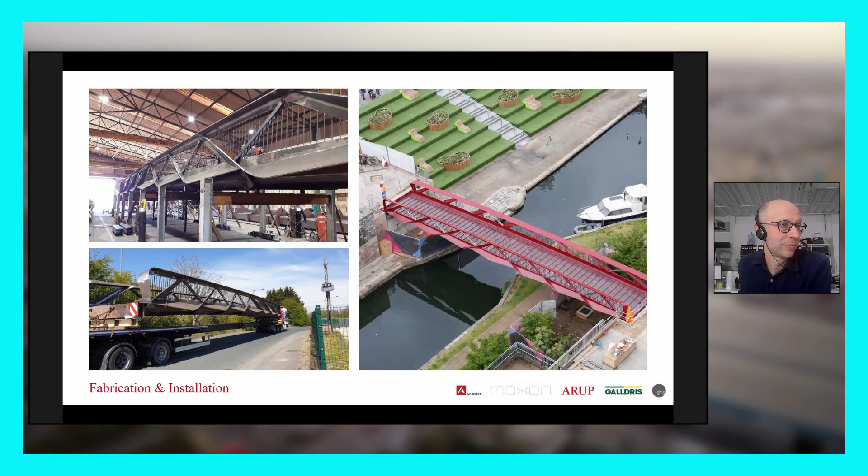I'm going to try to play a quick video taking you through seeing one of these arrive on site—getting it installed in a day is one of the most satisfying feelings I've experienced. So there it is, you can see right away boats are going under it again. Kind of nice to see a well-planned thing, well executed.

Going back to this feeling of belonging, the way a structure can feel at home comes right down to the finishing details. So in this case, looking at the way the bridge meets the land, the four corners received as much design input as the entire rest of the structure. Working on that, making all of that disappear to everyday users, concealing the abutment chamber within brick-clad doors—things like that are really important to us.

I think Carlos mentioned in the introduction that the bridge was named by a local school who did a unit in bridge design. They also looked at the history of the neighborhood, and they came up with a name that was fitting to the neighborhood, and we were quite flattered and pleased that we were able to involve them.

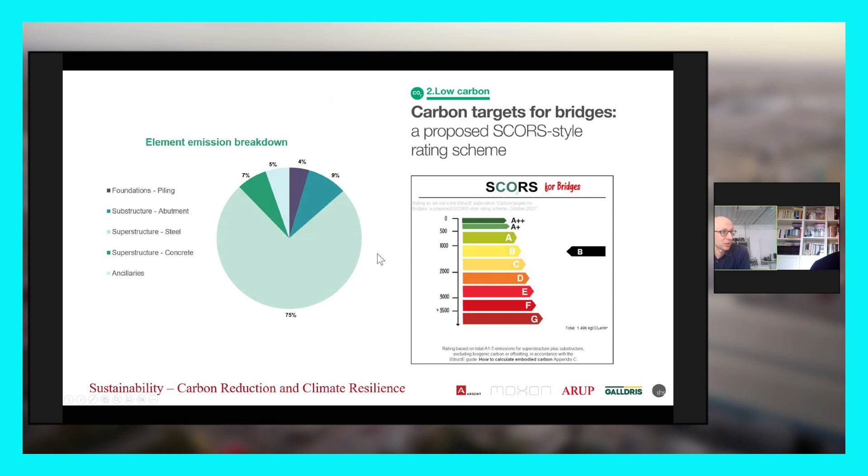Just very quickly, this was a carbon rating which has only come online within the bridge community in the last year or so. So we didn't have the opportunity to evaluate the bridge during design, but afterwards we've gone back and done an assessment, and we're pleased - I think it scores fairly well. I think one of the reasons it scores as well as it does is because of that southern abutment. Obviously a lot of steel went into it, but I think that's part of this solid feeling, solidity of it.

And this is just seeing it in operation. I believe this was during Wimbledon, so you can see it there as one of the viewing platforms. And just a nice quote from the happy client saying how important this is as a bridge, as a destination, as something that will draw people through the space, and its effectiveness of doing what we set out to do.

Yeah, so that's it. I think thank you very much, Ezra. Yep, my pleasure, thank you very much indeed. That was fascinating, really fascinating.

I've always been a bit ambivalent about the whole kind of private nature of the King's Cross regeneration, but every time I go there, I can't fail to be impressed by the level of general design quality of that whole Argent development. I mean, you might take or leave some of the office buildings that are part of that wider regeneration, but the actual public spaces in Granary Square and around it are really quite special. And I think you've built on that quite well.

A couple of comments actually. The first one, when I saw that bridge going in, I thought, what the hell are you building another bridge just about 30 meters away from the main crossing into Granary Square? But the experience of those two things are extremely different. The crossing just feels like a run of motorway - you don't even know you're on a bridge when you're passing over that. There's no experience of that at all, effectively, not even when you're on the edge of it.

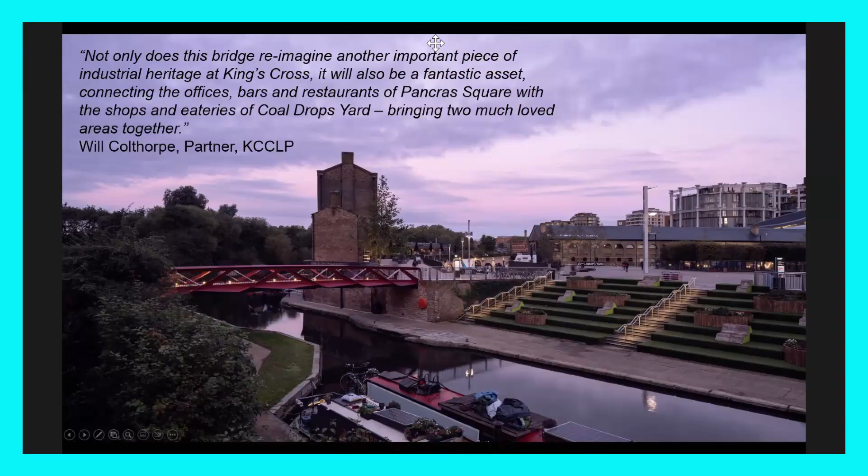All right, here we go then. I'm just going to share my screen. Here we go.

We are a German company, the UK subsidiary. What I'm going to do today is talk about space efficiency. As I just mentioned with Carlos, the market has changed, the environment's changed. I think people's view of the car has changed and is changing. It's still a problem - about 33 million of them in this country, which as a big box of metal things is a huge storage problem. We're also thinking deeper about integrating them into our transport nodes, hubs, trying to create more urban spaces for people, for quality of life.

We've been doing this for many years now. It's very big in Germany and continental Europe, and we've really been tail-end Charlies, probably running about 10, 15 years behind them in what they're doing. They have gone to the point of even digging up streets and putting all the cars underneath, which creates urban space.

All I'm going to do today, in around 10 minutes, is show you a huge subject. We make around 100 plus different models, all for different circumstances, different shapes, to do different things. So what I'm going to do is talk about how they save space, and then go on to a real project, one that we did in Knightsbridge called Knightsbridge Gardens.

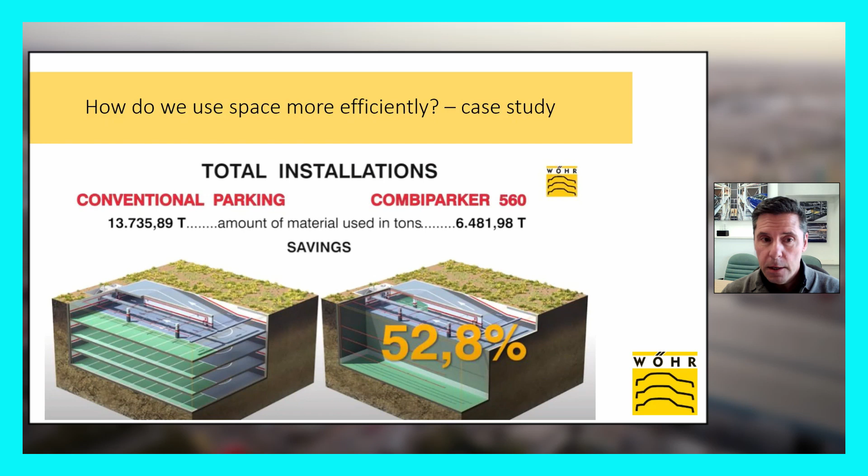In this day and age of environment and sustainability, that is a huge, significant build cost and saving on Earth's resources. So this was an example we did, and it broke down into a pit excavation, 52% saving.

I won't bore everybody going through each of the stats, you can read those, but it's interesting that bottom line, the occupancy, which is what we're always determined to try and find, is the ultimate efficiency for occupancy. So what that's saying is we've used almost 80% of the space that's been created just for the cars. There isn't that huge amount of wasted space with ramps and everything else.

Broke it down further: a 49% advantage on energy, 51% CO2 saving, and 52% material saving.

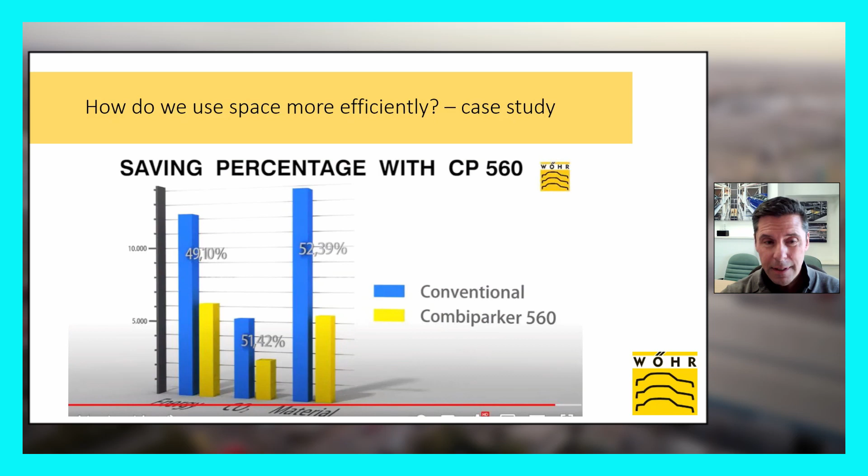So it's significant. We are finding in various projects, working with architects and developers, to actually find the optimum way of making it work and be sustainable.

One of the projects, right in the centre of London, in Knightsbridge Gardens, originally called K1, Fletcher Priest Architects designed the building. Quite a complex development, obviously, at that busy junction, Harrods and Harvey Nichols, with the main Brompton Road running right in front of it.

The facade was a listed facade which had to be maintained, and they had to get an awful lot into the building.

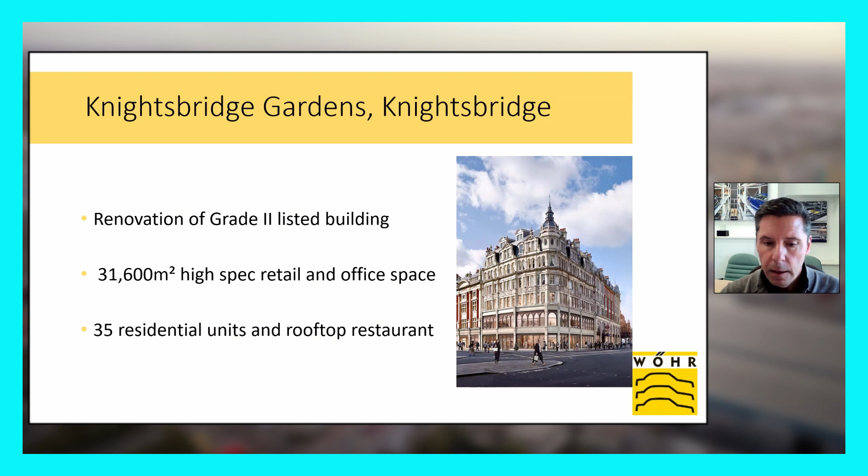So, even almost about 32,000 square meters of office and retail space with 35 residential units. So the last thing they wanted was to have large space taken up by parking space for the residential units.

They only wanted 19 spaces. So we worked along with them to create and work out which system was the most feasible and practical for them. This was a semi-automated system.

As I said, we make over 100 systems, but basically parking systems are grouped into 3 groups. Stackers, which are just basically up and down machines, hydraulic. At the other end, they're fully automatic systems.

So you have entrances, multiple entrances, and they park vertically above or below ground, and they can be very fast, even for public parking. But in the middle ground, there's often systems that people don't know a lot about. What they are, though, is some of the most space-efficient systems that you can have.

So the Combi 543, which we call it, is a 3-level system. It's built in a modular way of steel frames, and we lose 1 parking space in whatever grid length we create.

So on this particular system, we calculated, compared with having 19 spaces with their aisles in front at 6 or 6.5 meters, we saved just under 60% of the space that would normally be used for 19 parking spaces.

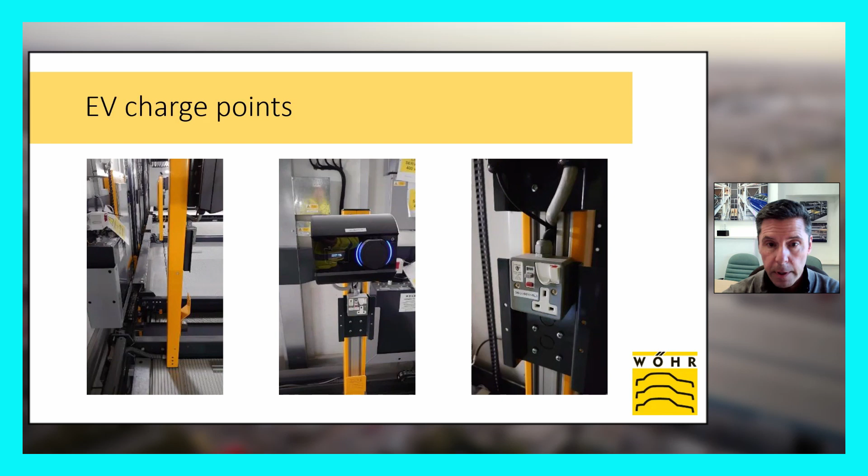More shots of the system. On this one we've got quite a few special finishes: powder coating, aluminium platforms, and EV points. EV points is a good question - a lot of people now need them on everything. It's a standard option, with trickle chargers for some particular cars that need it permanently. That's all incorporated into all the parking spaces on all of the systems.

So that was, again, a whistle-stop tour of the whole concept. It's a huge concept, but that's the essence of what we're trying to do - just make storage of cars in a smaller space than you'd normally need, and how we can then help integrate that into transport nodes, hubs, and many other things we're talking to people about at the moment.